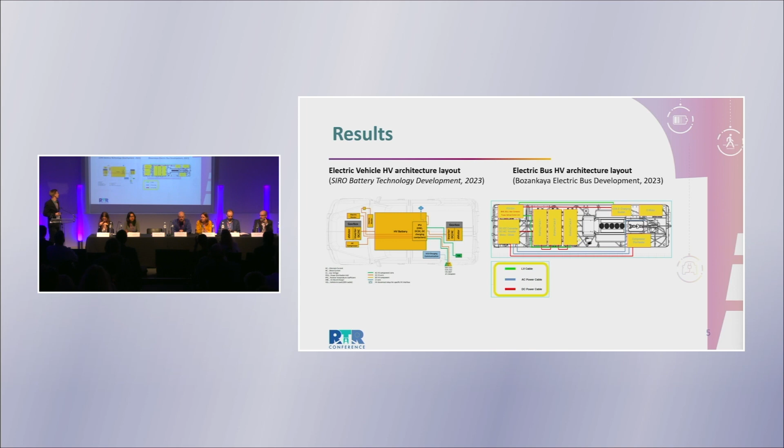I wanted to make it easy since we only have a short time, so I will give you an overview of the results. What we first do, of course, when we want to construct our modules for the different use cases, is define a baseline and general requirements. So we looked at different use cases, for example electric vehicles, electric buses. Then we also have to look at the internal components - for example, you can see here for the BMS the different parts we need, and for the battery thermal management system.

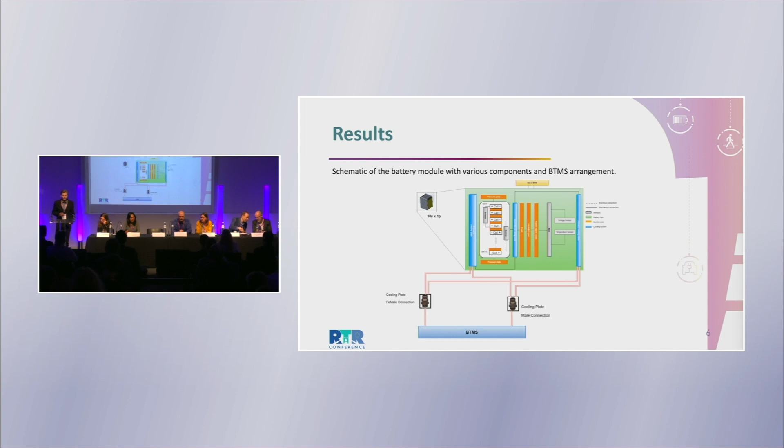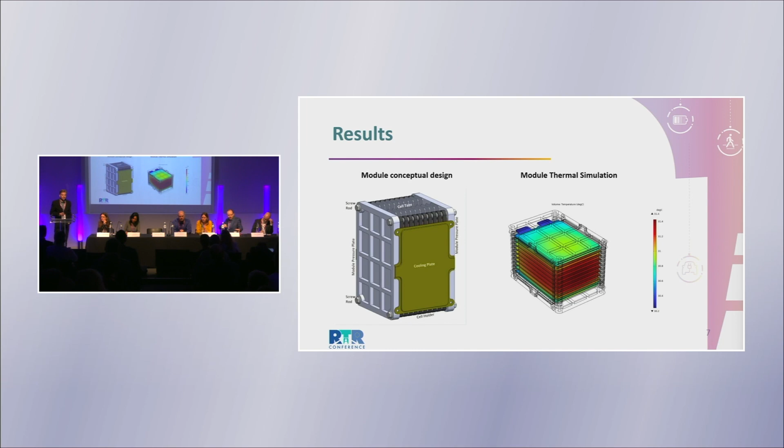At the start of our project, we designed a first conceptual design of the module, which you can see here on the left. We will use this to characterize it with different thermal and electrical simulations.

I just want to give you some aspects of the different work packages. It's not only about building these modules, but also about achieving our KPIs. We looked at different solutions.

One is the electrical solution, which includes wireless communication. In our different use cases, we will actually use 3 different solutions for electrical monitoring of the cells: one includes wireless communication, another also includes printed sensors, and one differs in the amount of sensors, also including thermal temperature sensors.

Other work packages include the electrical characterization of the cell, but also electrical and thermal modeling. In this case, we really use the data we get from the characterization of the cell and use it for our modeling system.

Because one of our KPIs is also thermal propagation, we constructed a reduced scale module testing. We don't want to run all the tests on our 3 full modules and burn them down, so we built this reduced scale module to learn about thermal propagation of the cell inside a module. In this reduced scale module, we also use advanced materials, special heat spreaders, and heat shields.

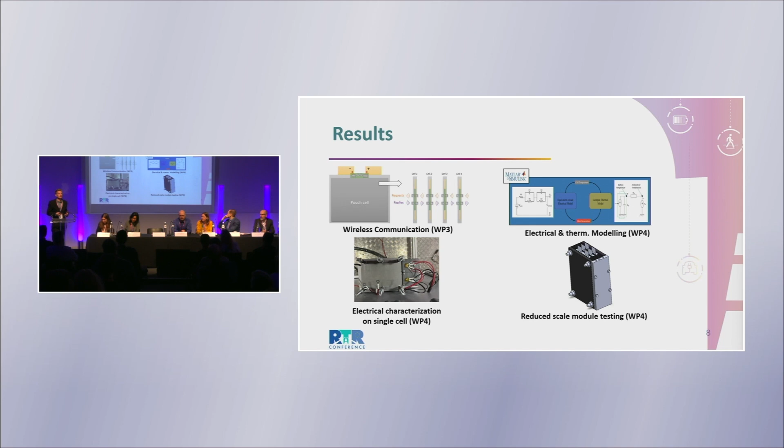Here you can see other aspects of our work packages. In the last months we made progress, updating our design to use more cells. We will use this module design to define certain virtual use cases.

As I mentioned earlier, we have 3 use cases for the modules, connected to energy storage, EV, and buses. We discuss this through virtual use cases.

We also performed abuse tests on the cell, which we will use for our modeling. Another work package is the identification of key exploitable results.

As mentioned today, in the innovation chain we have 3 pillars. We use a technology from pillar 1, which is semi-solid state batteries, and we go into pillar 2. We also want to know what is needed to bring the TRL level at the end of the project to higher TRL levels. That's why we identified key exploitable results which are important in our project, which we will discuss in detail.

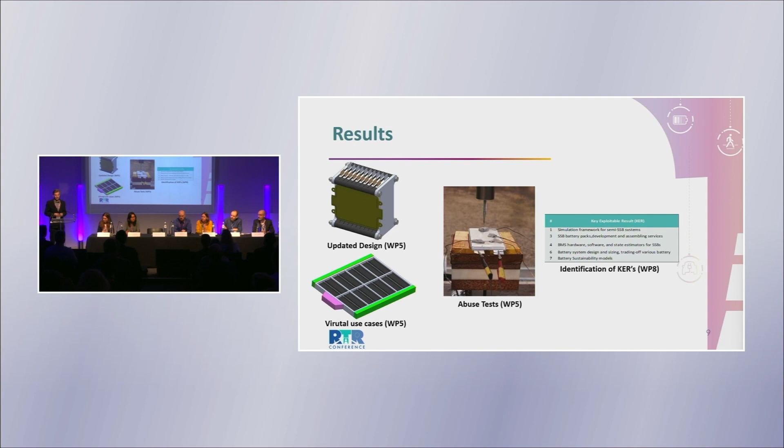Another work package, as I mentioned at the beginning, is that we don't only want to build the modules and estimate the parameters of the use cases, but also want to know about manufacturing cost and recycling. That's why the LDf-X methodology was developed, which is in fact a life cycle assessment study in which we will bring information from our project.

This will also be compared to literature values, but we will also bring use cases from our industrial partners. From BMZ, we will give an e-bus use case, which we will compare here to show that this approach with our modules has high recyclability and good dismantling properties.

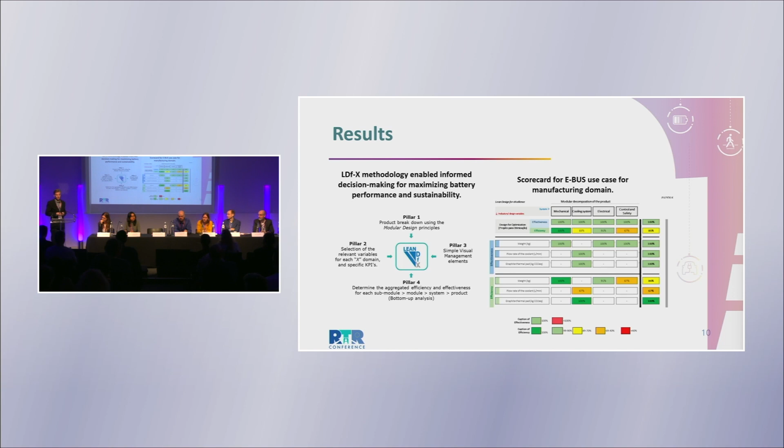Okay, then I already come to the mid and long-term expected impacts of the project. So what is yet to come? Our goal is to build the 3 demonstrators for the 3 different use cases.

We will use different materials which are suitable for the different use cases. We will apply different workloads connected to the different use cases, and then we can test our modules.

Another goal of ours is to have 3 workshops, which are all planned for this year, and yeah, this is yet to come.

And the last aspect is what is important here: for the EU, how to disrupt.

We want to further optimize the semi-solid state battery system, but also the solid state battery which we had at the beginning. I think, as I see the project, it's also an important task to show the benefits and drawbacks of solid state battery technology and compare this to lithium-ion, but also semi-solid battery systems for the different applications. We want to evaluate how we can scale up the capacity of manufacturing.

And this will be one of the big challenges. Of course, we can also do this only virtually, through this life cycle assessment. And then we want to develop sustainable recycling and second life solutions for semi-solid state batteries.

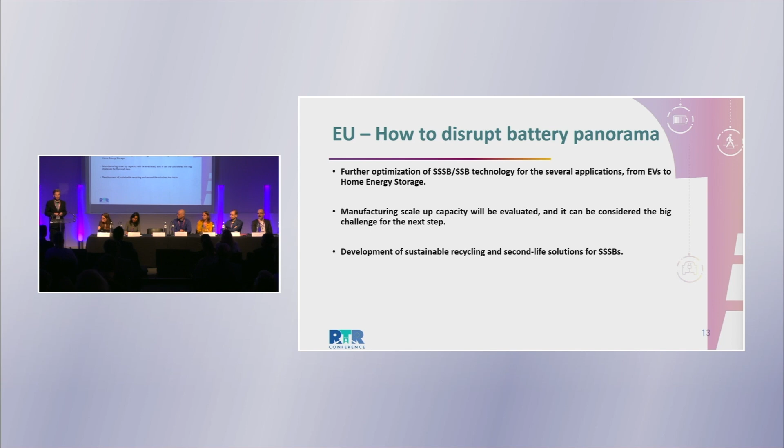Yeah, and as I promised, I made it short. Thank you for your attention.

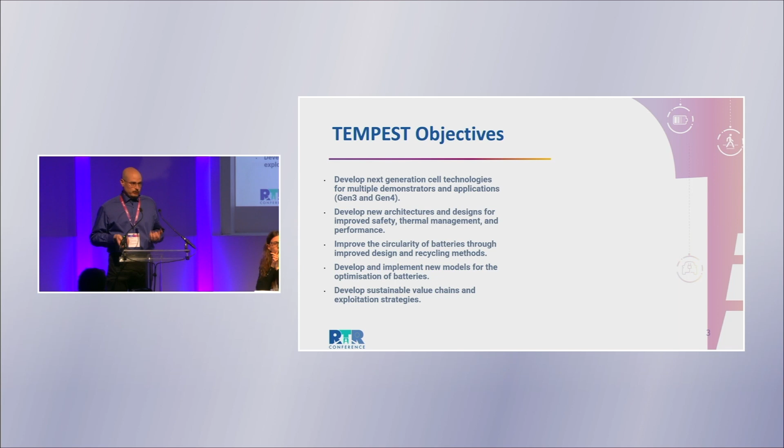We want new architectures so we can optimize space and weight, but also improve circularity through better methods for assembling and disassembling at end of life, recycling materials, recovering metals, recovering graphite and reusing it, and using new models to optimize performance and mechanical behavior of the batteries, and finally to develop sustainable value chains. One thing I want to point out is that we are unique amongst the projects presented today in that we use composite housings. This has been one of the challenges, but also one of the technological opportunities here.

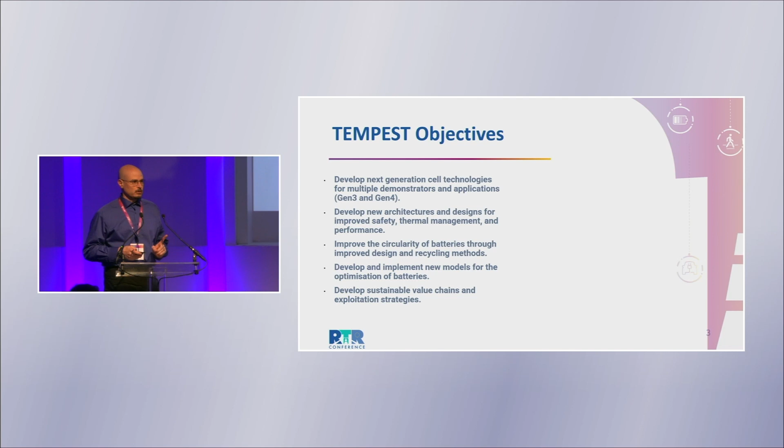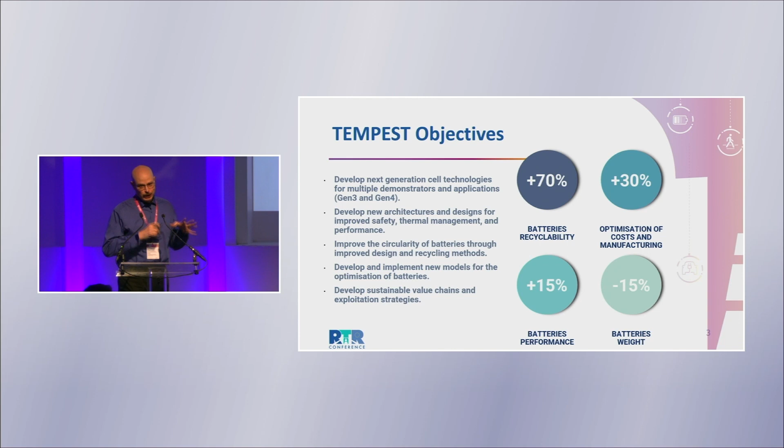Our overall goal is to achieve at least 70% recyclability in the batteries, reduce manufacturing cost by about 30%, increase performance by about 15%, and reduce the weight of the overall pack by about 15%. This latter point, we've already been able to demonstrate, at least in the gravimetric cell-to-pack ratio - we've completely exceeded that. We're at around 80% now, simply by shifting from aluminum or steel housings to composites. We've been able to dramatically reduce the weight.

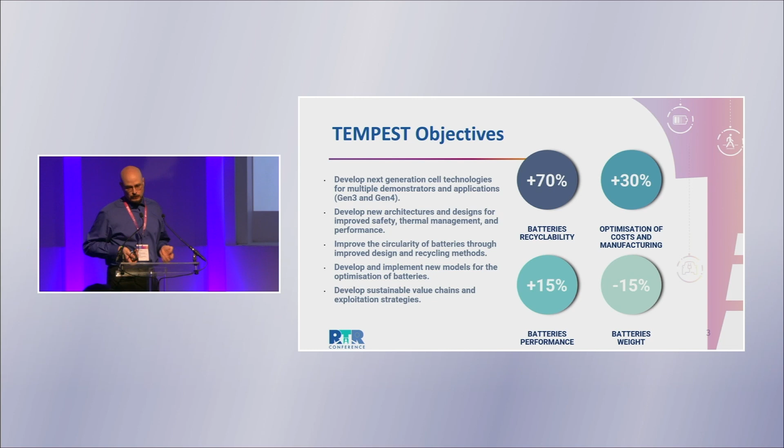In the results, I'll briefly introduce the different types of packs or cells we're using. You can see we have Gen 3 and Gen 4 here, and we've already started testing and evaluating the cells to establish the data baseline for everything else that will be done. One of the important things, as I pointed out, is we have composite systems. These composite systems have different behaviors in terms of what everybody accepts for how a housing behaves if it's metal - crash resistance, corrosion resistance.

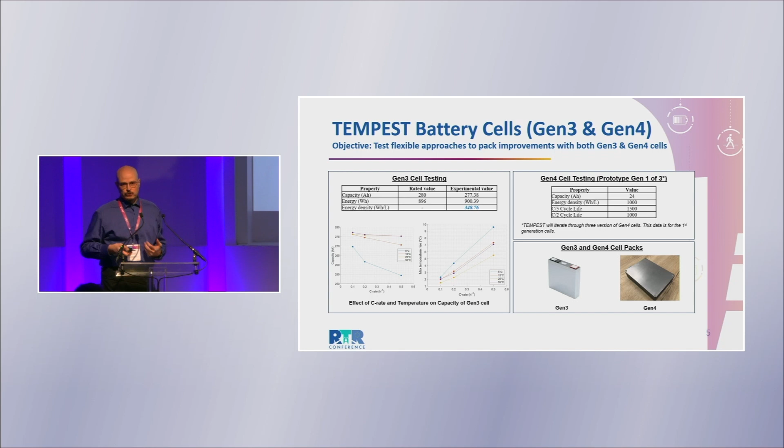One of the things we're implementing is a structural health monitoring system. It will continuously monitor the composite system, detect if there's a fissure, and communicate back to the battery management system to tell, for example, the driver of a car that there's a problem and it needs to go to the service station as soon as possible.

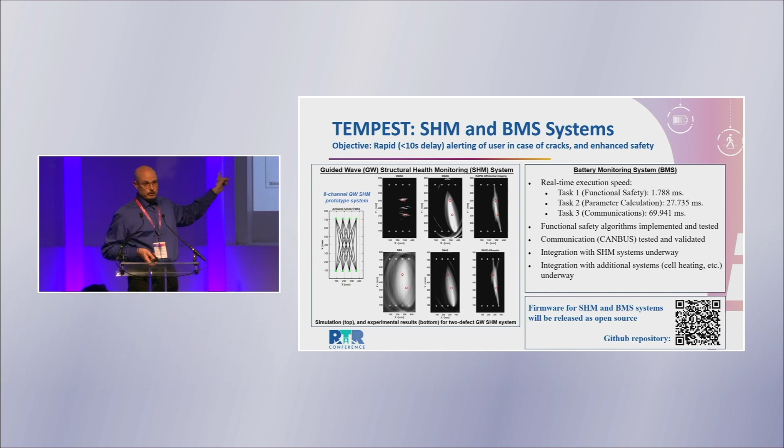The other thing I want to point out is that one of the goals is to be as open as possible. So the firmware for this SHM system, as well as the BMS, will be open sourced and available soon.

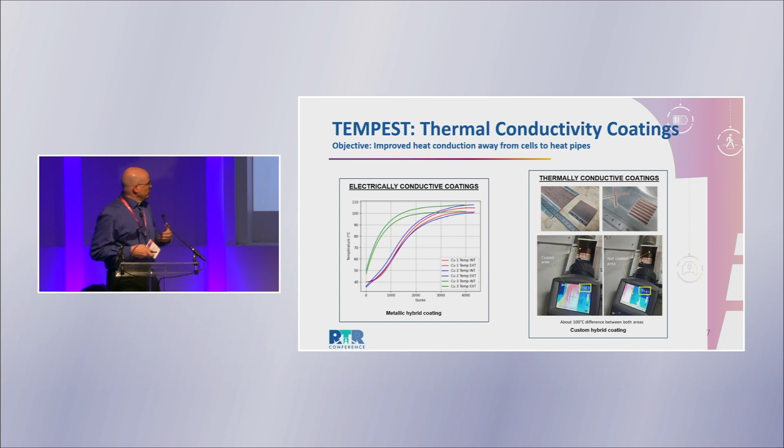One of the other things we want to address is improving thermal management. We're developing thermally conductive coatings for assisting in transferring heat from the cells to the cooling system. These are deposited by cold spray, and these are the prototypes we have right now.

In addition, we're looking at physical and thermal protection. First, we've done modeling to evaluate impact resistance of the housing to impacts such as rocks from the bottom. We've also done modeling to set the computational baseline for when you have the impact of a pole or some other large object against the housing.

To complement this, we are working on impact and abrasion-resistant coatings to go onto the packs.

In addition, fire is always a significant issue. To help address this, we are developing two different types of coatings in the project. The first is a fireproofing coating for the inside, to essentially auto-extinguish any cell fires as they occur. It's a one-time use coating, but it's something we're currently developing. The second is a flame-resistant coating designed to protect the outside.

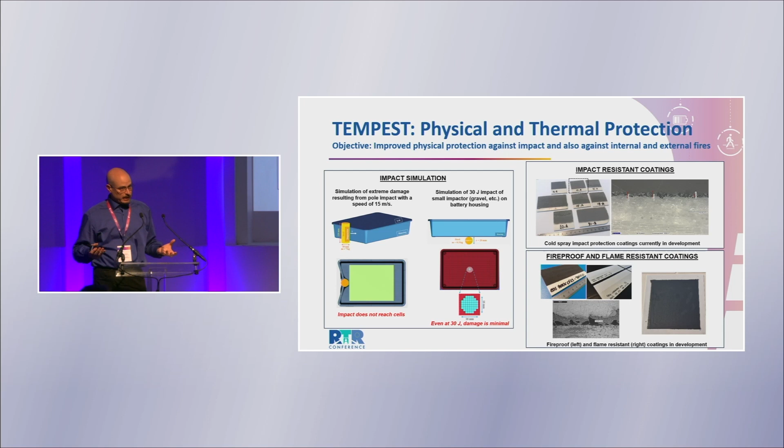Say, for example, there's a fuel leak in a crash and there's a fire. What it will do is swell up and protect the housing, giving it that much more time to resist the heat.

We are also looking at circularity. One of the things that's important is at end of life, how do you address this? First, through using LDM composites, we're going towards a composite formulation that is, by design, more recyclable.

Second, we're using debonding-on-command adhesives, which by themselves, once deposited, have very strong strength. But at end of life, simply through the application of heat, they become very easy to debond—you can basically just pull them apart.

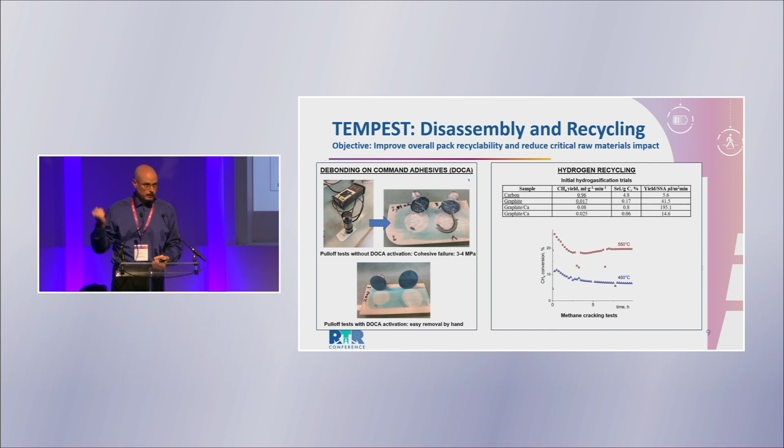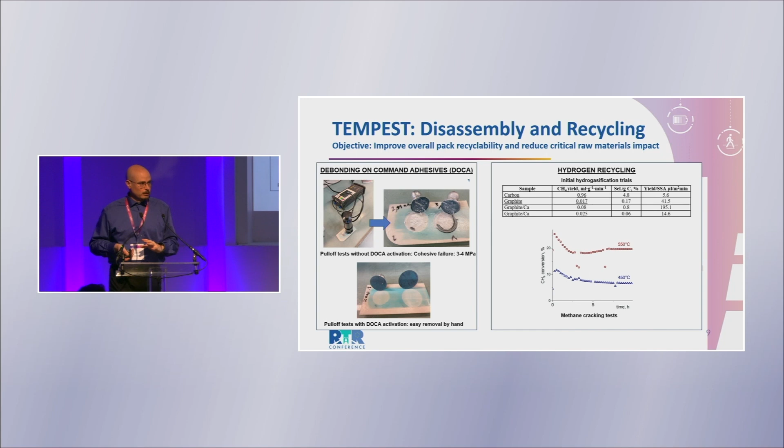The other aspect is that once you've got these apart, the most important thing, the critical raw materials aspect, is something that needs to be addressed. That's the next thing we're addressing, through methods developed by the National Institutes of Chemistry. We're looking at methods using hydrogen routes to both recover and transform the graphite, as well as recover the metals. So the idea is to have a circular pipeline for recovering the materials at end of life.

So what are the mid to long-term expected impacts? There's a lot to go through and unpack. The most important thing is that we want to address the volumetric cell-to-pack ratio and the gravimetric cell-to-pack ratio.

Now, the volumetric cell-to-pack ratio you can improve simply by getting rid of modules—that's one of the easiest approaches. So we're using a cell-to-pack ratio to address that.

Second, the gravimetric cell-to-pack ratio, which is commonly one of the more difficult areas to address. In this project, we've addressed it in large part through moving towards composites, which has given us a huge boost in weight savings.

One thing I haven't talked about here, because we haven't gotten to it yet in the project, is that we're going to develop a system called energy storage as a service. I won't go over it in detail here because it would take a while to explain, but the basic concept is to introduce new economic models for the supply, use, and recovery, essentially developing a circular economic model to encourage both manufacturers and users to participate.

We are also going to engage further with the JRC to help work on developing new standards and new policy. And we are also in the process of developing training programs for upskilling. As mentioned before, I'm the chair of the EU Ingenious Cluster, so I will be happy to address any questions for that.

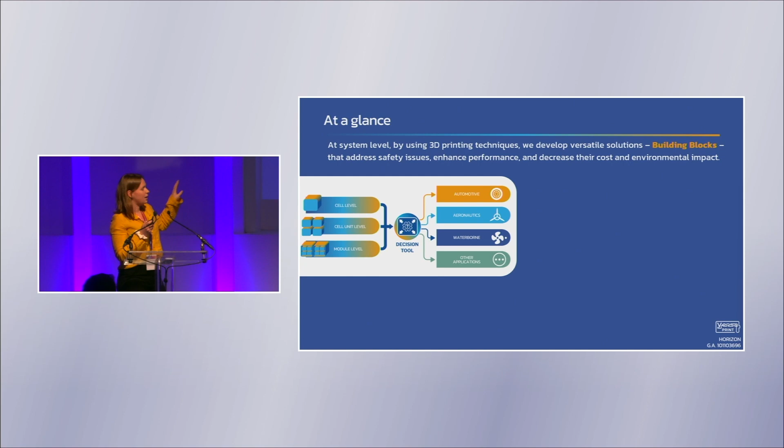At the center of the project, we are developing a decision tool to help combine these new technologies that we call building blocks. We develop different building blocks, and this decision tool will help us combine them for a specific application. We also have a wide range of applications here: automotive, aeronautics, waterborne, and others. The goal is to see and optimize the new technologies for a specific application.

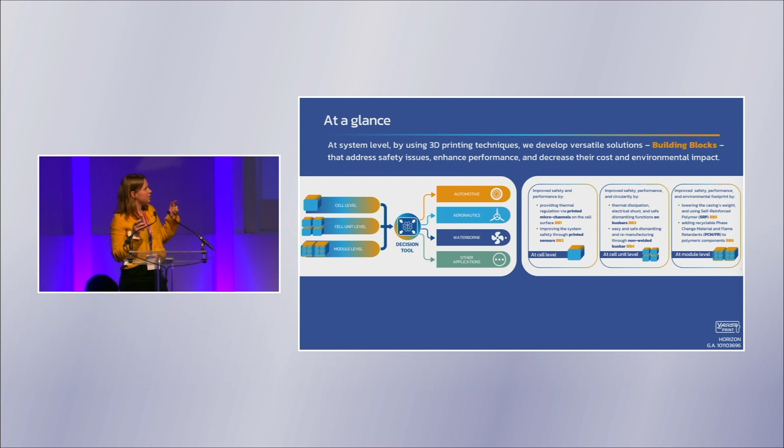A bit more in detail, today I will not present all of the building blocks, just some of them where we have interesting results. When it's called BB, it's building block. So at cell level, just around the cell, we developed building block 1, which is microchannels for efficient thermal management, to cool down the cell efficiently.

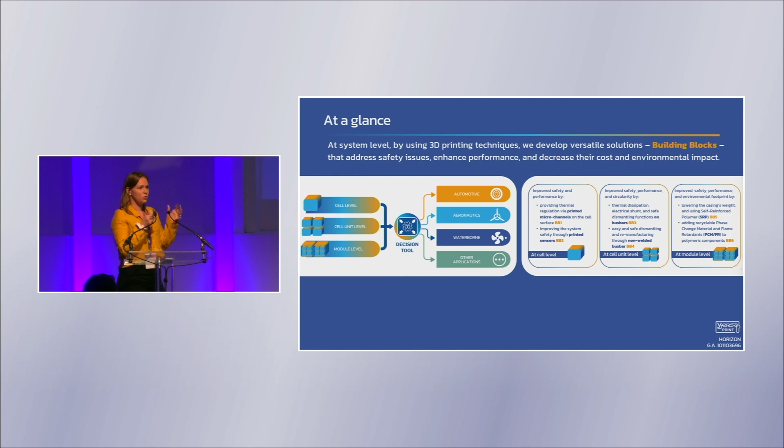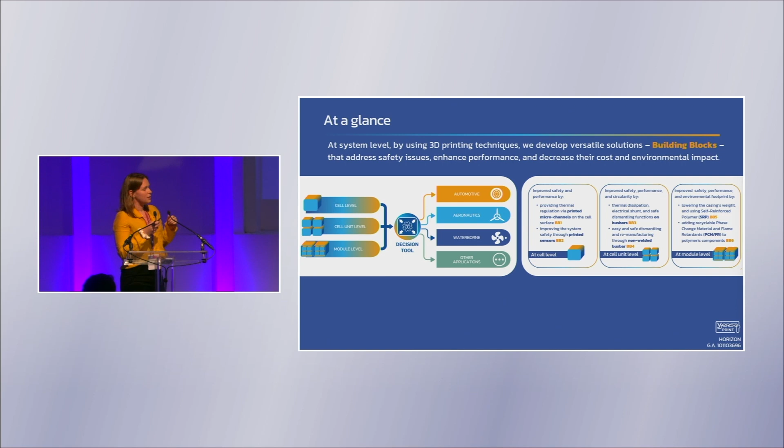And we 3D print this cold plate in silicone directly at the surface of the cell. I will also present you building block 2, sensors that we would like to print directly at the surface of the cell to sense temperature and detect hydrogen.

At cell unit level, it means connecting different cells together. We mainly worked on bus bars, and I will present you some interesting bus bars we developed that are non-welded and easy to assemble and disassemble. At module level, we worked on lightweight material for the casing and also an exhaust gas management system to drive particles and gas out during a thermal runaway event.

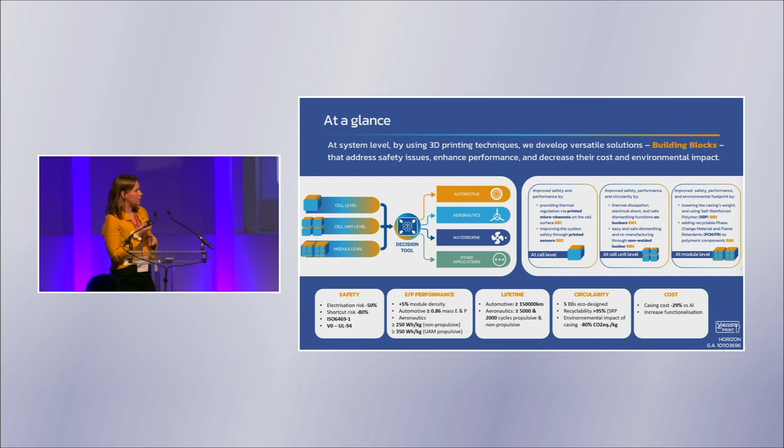Here you can see the KPIs, the objectives we have in our project, and you can see that they all target and try to answer the challenges batteries are facing today. They aim at increasing safety - we've talked before about problems with thermal runaways, for example. So we do have technologies that try to increase safety, increase performance, increase lifetime and circularity, working on sustainability of the technologies we develop, while trying as much as possible to reduce cost.

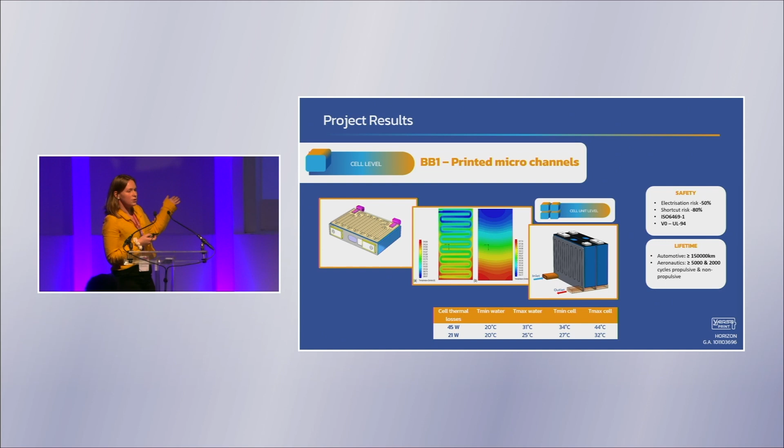Now, going into the details and results we can present after 18 months: we developed building block 1, microchannels you can see here on the left. It's a silicone plate that we 3D print directly at the surface of the cell, which cools it down very efficiently. Here you can see the thermal losses at 1C and 3C, the heat generated, and we can see we are keeping the cell at a very nice low temperature.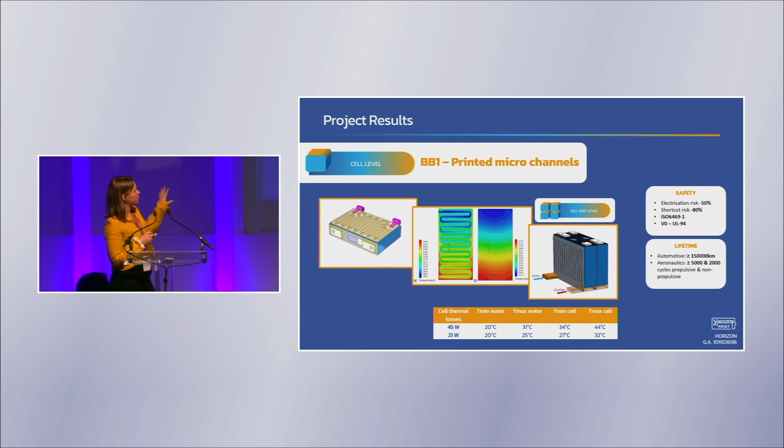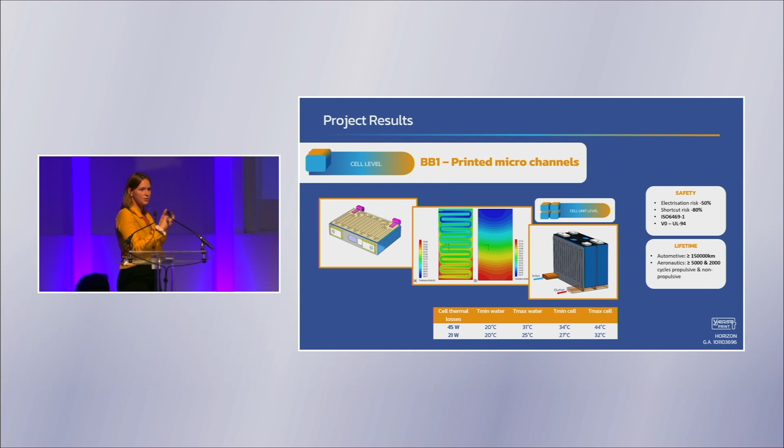This building block will have an impact, increasing safety because it will delay the thermal runaway event by cooling down the cell efficiently. It will also impact lifetime, because the conditions around the cell - temperature, pressure, and others - affect battery lifetime. So it increases performance and circularity.

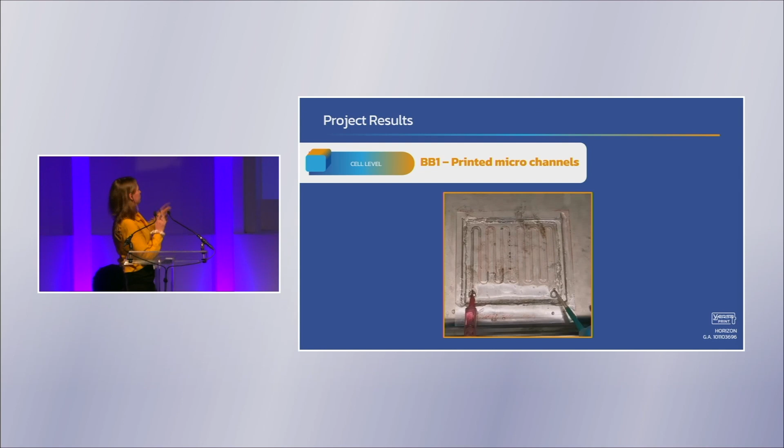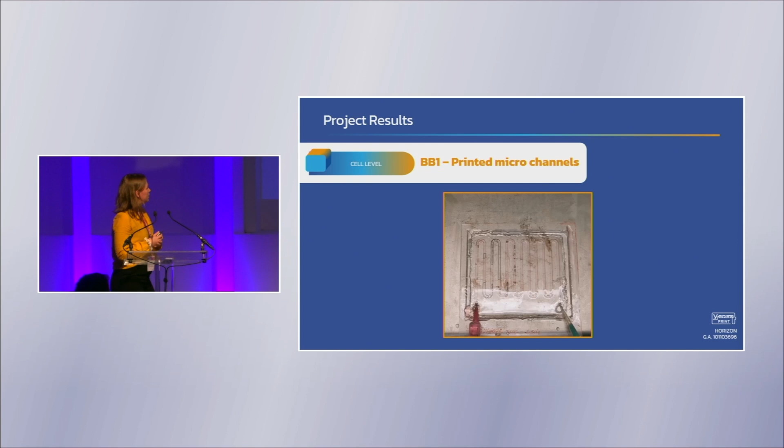Here it's actually a small video - I don't know how it works to click. Okay, it's starting already. This was actually from a few months ago, so now it's much more optimized than this, but it shows quickly the fluid circulating very nicely with no losses, no mechanical losses during the flowing of the fluid.

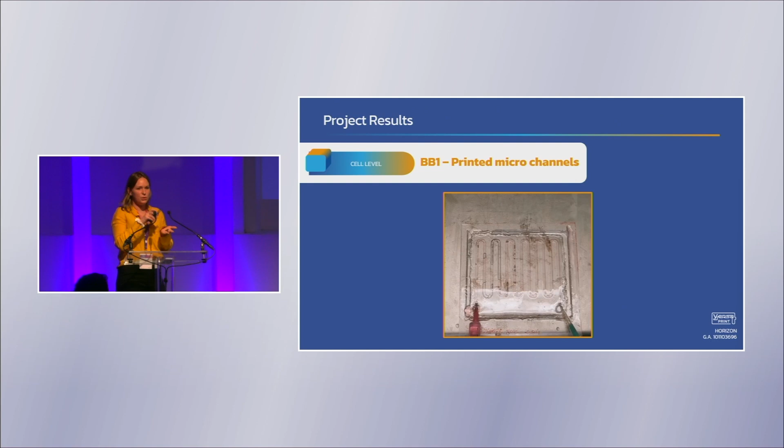And this we will print - we are printing it actually right now directly at the surface of the cell.

The second building block I am sharing with you is the sensors. These two sensors have been developed, and are still being developed, in the project. They have an impact on safety because we want to prevent thermal runaway or detect it. The first one detects temperature directly on the cell, and the second detects hydrogen, a gas produced when there is a thermal runaway event. Both sensors have been developed with water-based inks, making them more sustainable than commercial sensors.

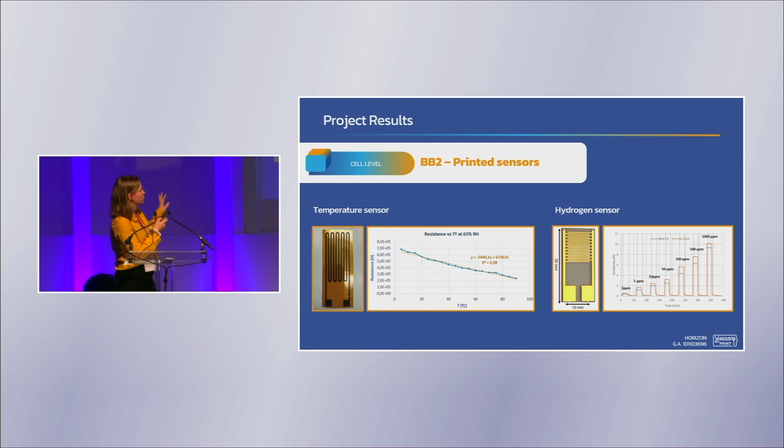We can see a nice linear answer for both of them. For temperature, we can see a linear decrease with a nice slope that makes the sensor sensitive, in a range of 0 to 100 degrees. But we do face challenges - we are still working on it - particularly in negative temperatures.

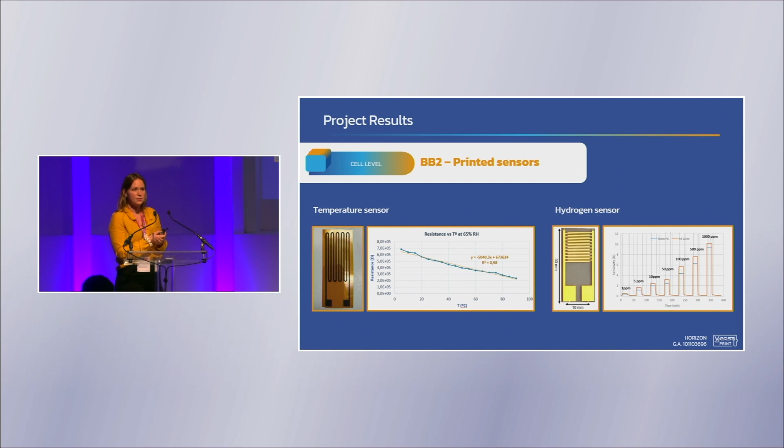For the hydrogen sensors, we can detect very low amounts of hydrogen, so it's very precise. We are still working on it because we face challenges here in the response time.

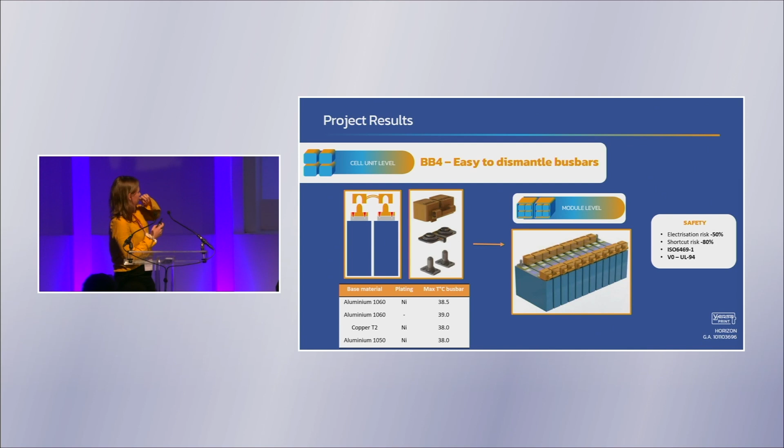Another building block, at cell unit level - when we connect cells together - is building block 4: an easy to dismantle bus bar that is non-welded. You can see the principle of this bus bar on the left here. We have this lower part that we weld directly on the cell, and then we only have to connect and clip the two higher parts on top of this welded part to connect the cells together.

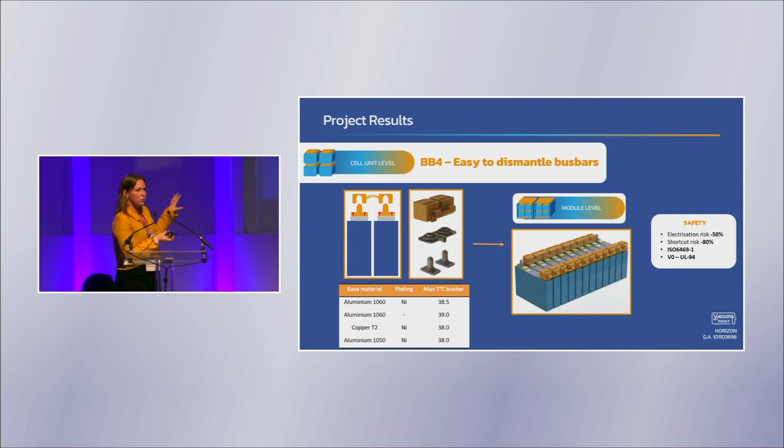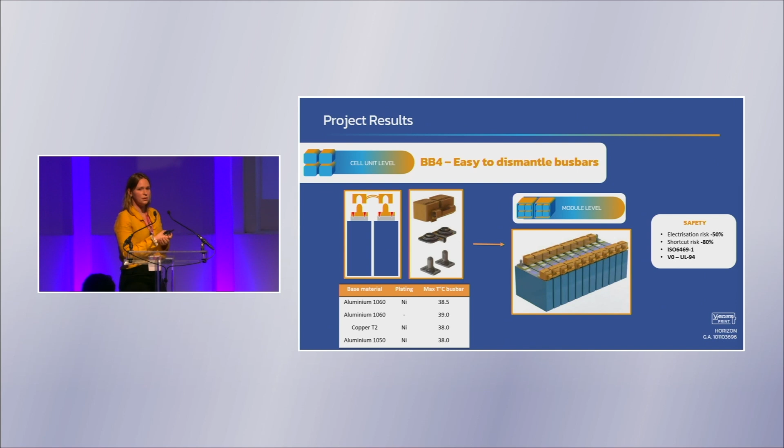It's a system that connects all the exits of the cells so that when there is a thermal runaway event, it collects the particles and gas that come from the thermal runaway and drives this out of the system in a precise location, also reducing the temperature of the exhausted gas and filtering the particles. This can prevent the gas and mix that comes out from catching fire.

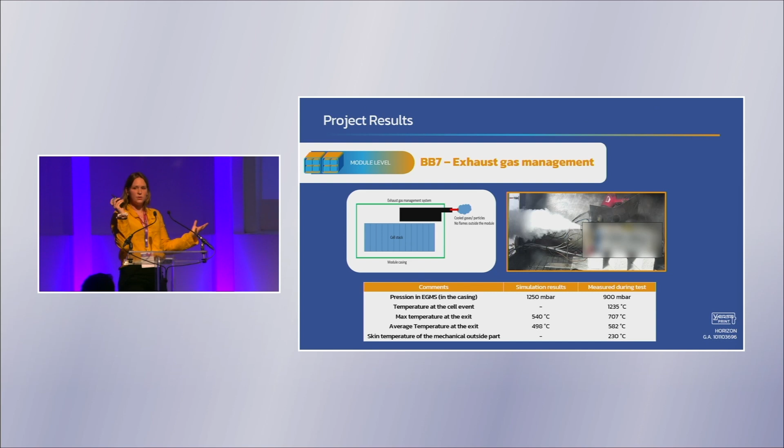You can see on the right the test we performed by overheating a cell. You can see the heat gun, and you can see the gas coming out in a precise location. So the gas didn't come out at some random point in the casing, but was driven to a precise location outside safely. You can also see it doesn't catch fire, thanks to the filtration, the pre-filtration inside the system of the particles.

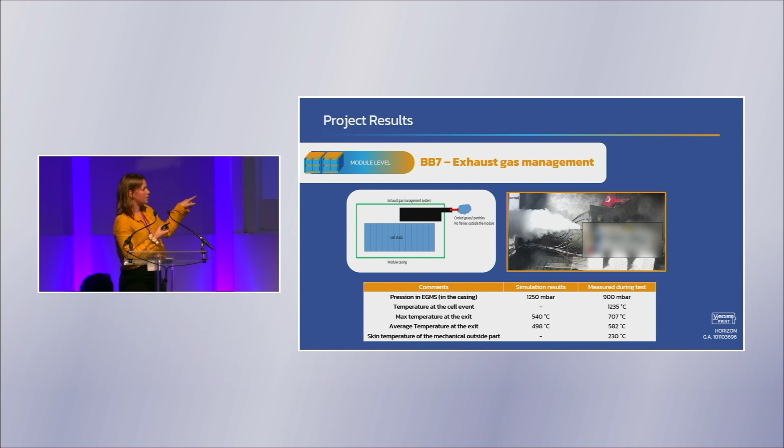What is interesting in the results is that the measured temperature at the cell where the thermal runaway happened was 1,200 degrees, and the temperature of the gas that came out was divided by 2, so 600 degrees. We actually have even better results right now, but it's already a very promising result.

Now, all these building blocks and technologies we are developing in VERSAPRINT answer the targeted objectives from the European Circular Economy Action Plan of 2020. Mainly, we are trying to increase the lifetime, to reuse, and to make it easy to disassemble and assemble, easing the processes at all phases of the technologies. We are also working on eco-design and lowering the environmental impact of our technologies. I will show you a bit more about this in a second.

VERSAPRINT also contributes to implementing the conclusions of the European Council, mainly developing versatile solutions, as I said in the beginning, for different transport applications. So we will be able to use different technologies for different applications, decrease fossil dependency, improve health conditions, and increase performance and safety while reducing costs.

Now, talking about sustainability, I take this opportunity to show you some results and concrete methods we used in VERSAPRINT to tackle sustainability and improve the sustainability of our technologies and batteries in general. We used two approaches: eco-design guidelines given at each point of the life cycle of the technologies, and on the other side an LCA tool to assess the environmental impact of our technologies.

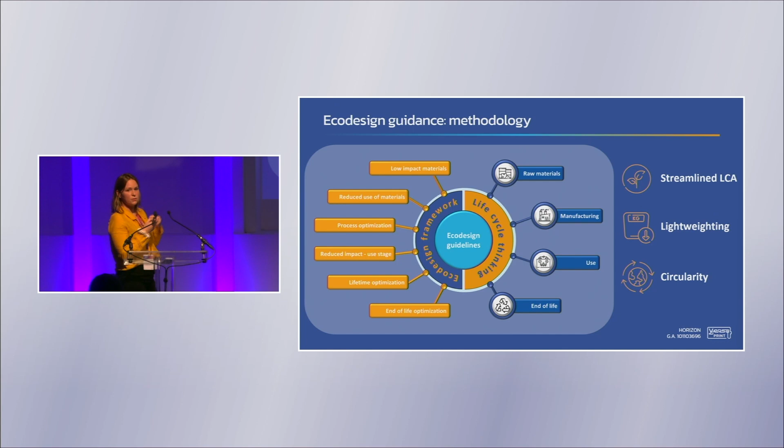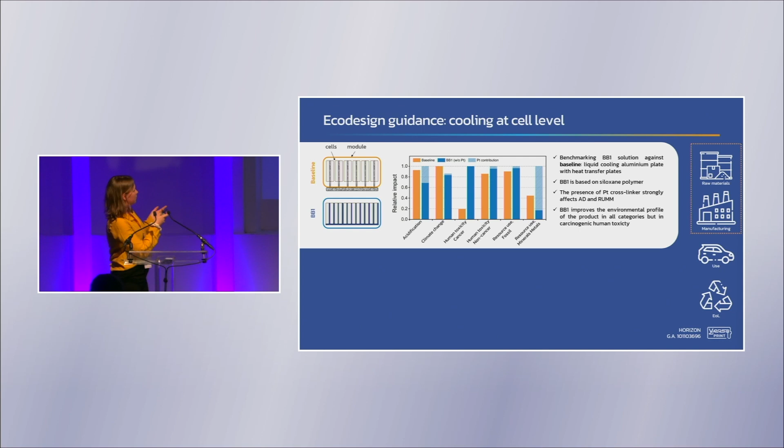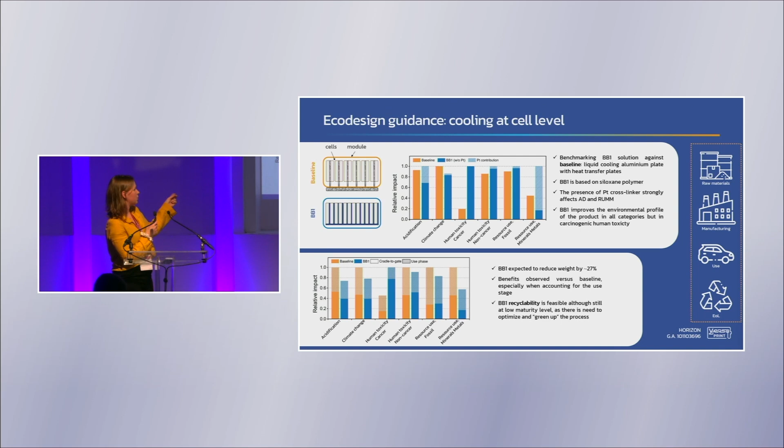But when we take the use phase and end of life phases into consideration, not only production, we account for the reduction in weight compared to the classic solution. We have a lightweight material, so less consumption and less environmental impact. This is what we see in the results: for not all, but some of the impact categories, we see lower environmental impact for our technology.

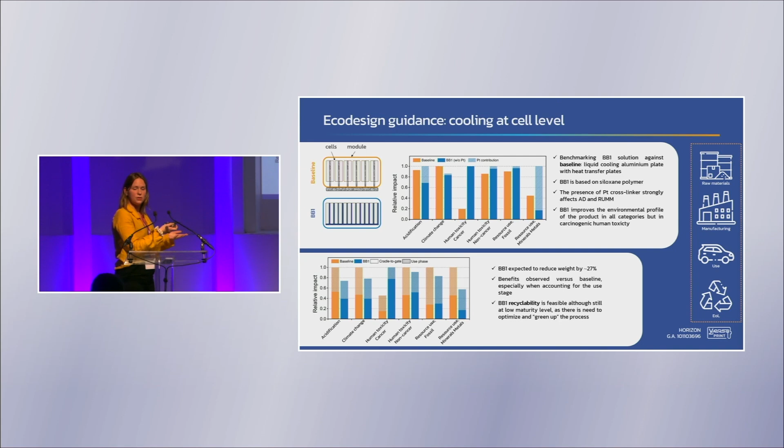This is what we have done for all the technologies we developed, to make sure we assess them and try to make them better than other commercial classic solutions. I have other results; if you want to talk about it, don't hesitate to come to me, and now I'll jump to the conclusion.

You have here our social media, and we also have deliverables that are public, so you can check our results, and you can always contact us for more information. I will be happy to answer and to contact you about this. And thank you for your attention.

Thank you very much, Lisa Lou, and thanks all the speakers for keeping the time. It's very important. We are already at 5:14. So one more thing I would like to say is that all our projects are aiming to achieve TRL 5 by the end of the project, meaning their demonstrators and technologies will reach TRL 5, validated in a relevant environment, and not going above. So it's good to remember this for the questions and answer session.

The next project is NEXTBAT, presented by Mikko Pihlatie, research professor on electrification of transport at VTT. The project aims to establish reliable and innovative battery systems, as well as to enhance recyclability and interoperability. It will incorporate battery management systems at the cell and system level and integrate innovative electronic sensing and actuating systems to enhance battery life. Finally, the project will contribute to decreasing the carbon footprint of the battery system by lowering production costs, with high recyclability capacity of both hardware and cell components introduced along the production chain. So, Mikko, the floor is yours.

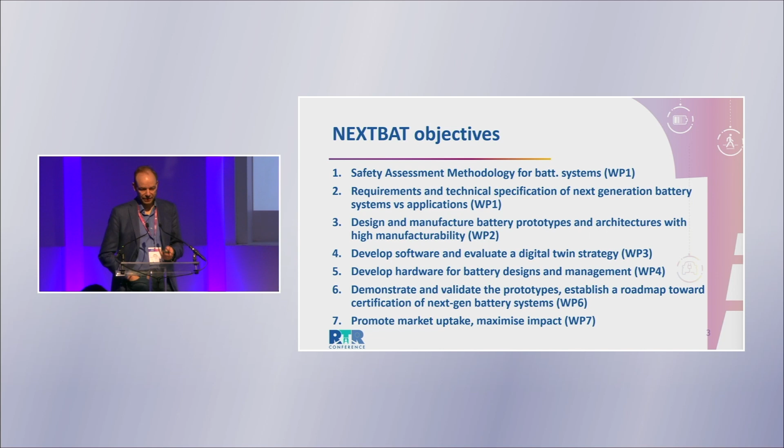So that's the setting. And now let's just delve into some of the highlights or the chosen results where we stand at the moment.

We set out to look into technology from battery cell being, of course, a key component of any battery system. So we need to understand sourcing cells, analyzing cells from the market - we were aiming at solid state battery packs or modules, struggled a bit to find solid state batteries from the market, and I think this has become quite clear for many actors here. So we made a compromise, as we heard also extended, using semi-solid state cells, and this is kind of in between.

We are wanting to push the specific energy towards 300 watt-hours per kg at system level later on. We will not reach that in NEXTBAT here, but we still want to analyze what that kind of technology will mean from the battery system level side. So there were generation 3B, more or less in the domain where the technology is at the moment, and 350 watt-hour per kg is the semi-solid cell track for the prototypes aiming at higher energy density.

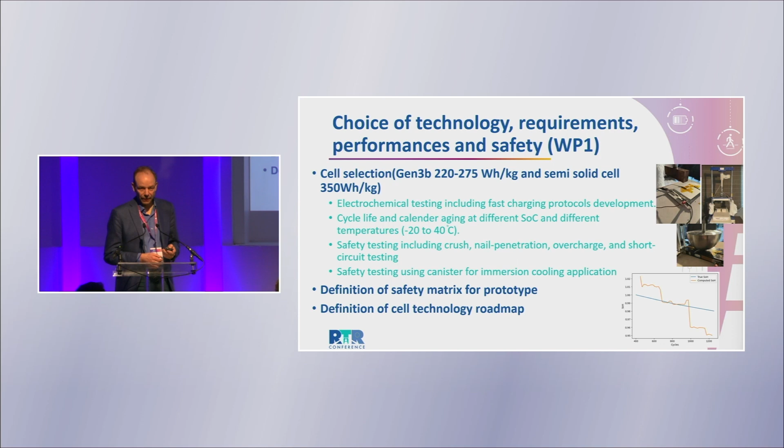So we've done various electrochemical testing, fast charging, cycle life, calendar life, aging - various types of quite standard testing. Safety testing at cell level, I'll get back to that a bit later - it ended up a bit later in the slide deck. Safety testing with a canister. We're working on immersion cooling at the second prototyping track, a bit more on that shortly. Safety matrix for testing - now we work at the cell level, but later on the safety validation and testing will be pushed up to module level. And then the cell technology roadmap, as we know there will be a lot of developments coming up.

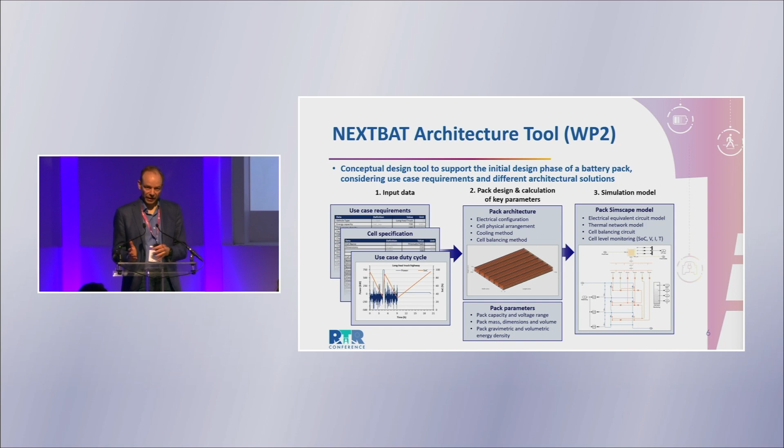Another big piece from another work package here, starting top down on design tools, how to approach the system architecture, system layouts, and there will be various combinations of these. So we have put up a library of duty cycles from the different types of road vehicles and others, conceptual design tools to take into account thermal design aspects, electrical architecture aspects, cell performance, duty cycles, and various configurations - excluding mechanics, because we are not reaching TRL5 for really mechanical packaging of packs. But this gives us a solid background to really work around the different concepts for technology and systems, and also place the different innovations that we're working with into the analysis framework.

A bit more on the prototypes. As said, 2 prototyping tracks - one aiming at high energy, so using the semi-solid state cells. This is for prototype 1. It's not a design-frozen module yet, so we'll stay at module level: 48 volts, 14 cells in series, 1 in parallel.

Packing of those, liquid cooling, BMS, and then packaging that at the module level.

Whereas prototype 2, we push the power density to a higher level, including two innovations here. One is the immersion cooling system. What's not shown here is that we're also working on the casing because we need a pressurized system, and it's also fiber-reinforced plastics combined with joining with aluminum. The reference would be a steel casing or aluminum casing there, so that's the weight reduction element.

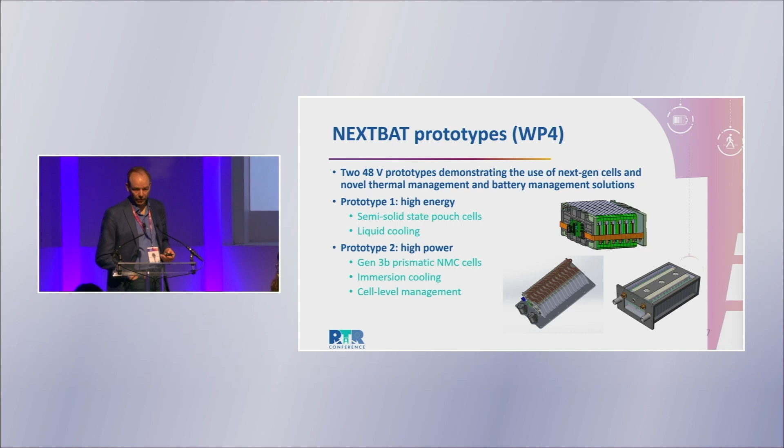A second innovation will be cell level monitoring, EIS, for advanced diagnostics to really work on safety-related states of temperature, for example, and then we have a maximum effective thermal management system to control that and really be safe, not to run over into the thermal runaway side.

Large activity in the high order models, and especially we have Barcelona Supercomputing Center being the main partner there, CFD modeling, and really analyzing the flow geometries and cooling, thermal runaway simulations included, so that's a high fidelity approach.

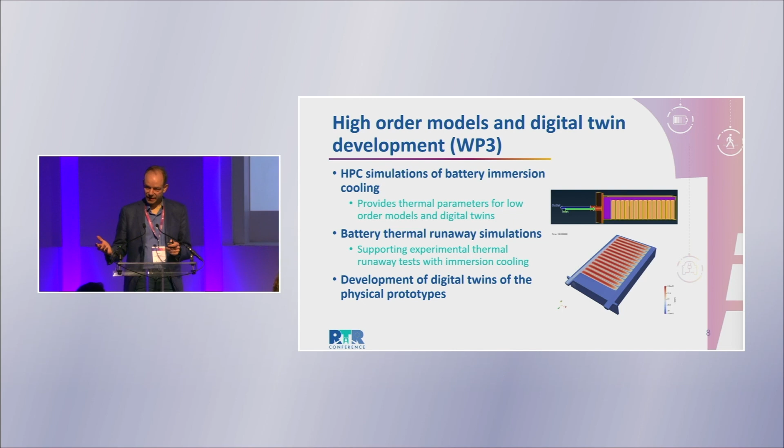We also have a number of physics-based models training AI surrogate models for cells for performance degradation and so on, and that will also lead, once the final design of the prototypes is fixed, to digital twinning of those and matching that with the test sequences, validation sequences, both normal operation and safety.

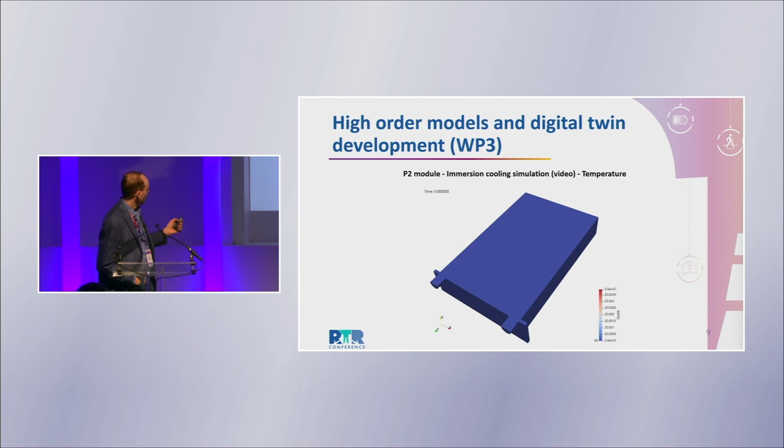And now let's see how the simulation video here works. I'm not completely sure how to start it. Yeah, it does. So just showing this is prototype 2, seeing a sequence of the thermal flow.

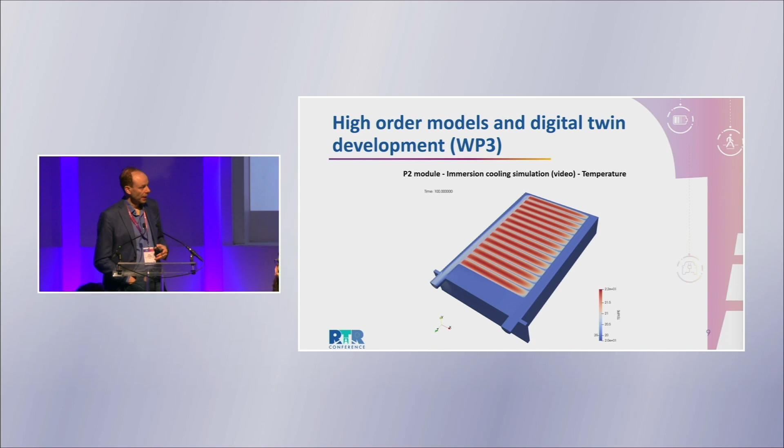And how the temperature gradients develop as part of the design space. We also did a sub-element like cell level simulation, choosing the electrode or the oil and some of the elements there, and I think this is done.

There's another one, fluid velocity, that was the temperature first. So this is also validating at this stage when we're finalizing the designs of both prototypes. This is on P2 on the thermal side.

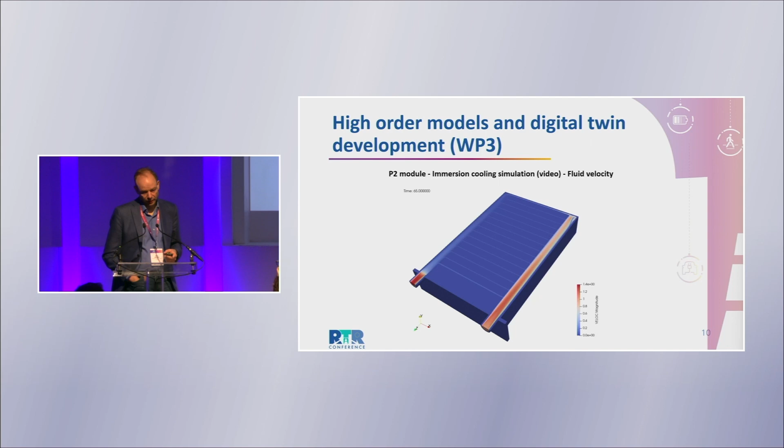I believe it's maybe, yeah.

Just a couple of words on the cell testing. So I started with the cell selection. We've looked into available cells, and we'll be following the roadmap type of approach later on, just to place well, as part of the comprehensive safety approach.

There's an inherent safety of the cells. Then there are intermediate subcomponents like thermal barriers, thermal management, and the management system as a whole, and then the structural elements and so on. So this is part of the inherent part, internal of the cells.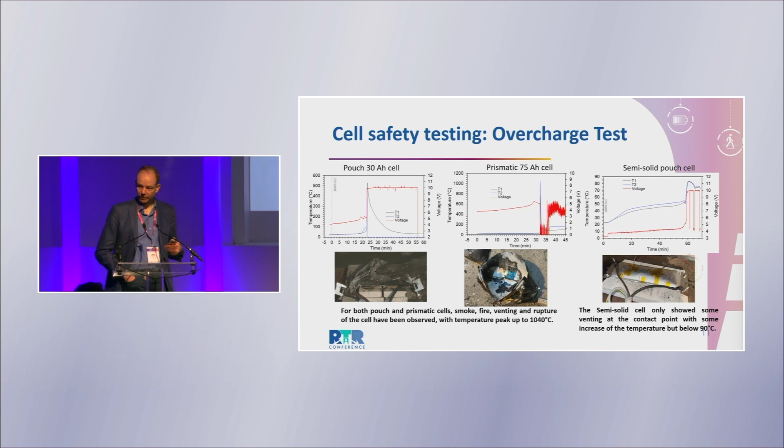So we've done destructive testing on all of the cells that have been in the matrix for screening. And later on, when the prototypes, two of each design, will be manufactured, they will also go to safety validation and testing later on during the second period here.

And then this is the last result I picked up. We're working on the battery passport, like usage analysis, and this is also supporting the LCA life cycle assessment, life cycle cost analysis, using the recently published regulation or standard on the battery passport, and how to utilize the data.

And this is linked into usage profiles. We also expect, with the digital twinning and the laboratory experiments, to really bring specific information and interface this with the BMS, which is of course an integral element of the safety approach as such.

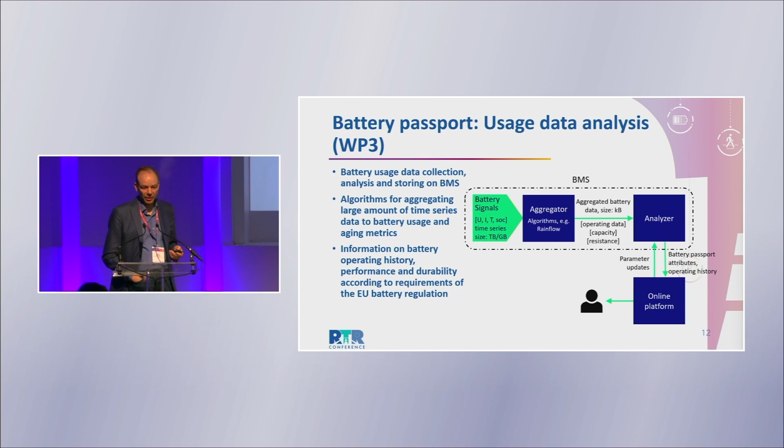Currently, as said, we are more or less, as we delve deeper still into the actual innovations that we work with, charting out the individual tracks.

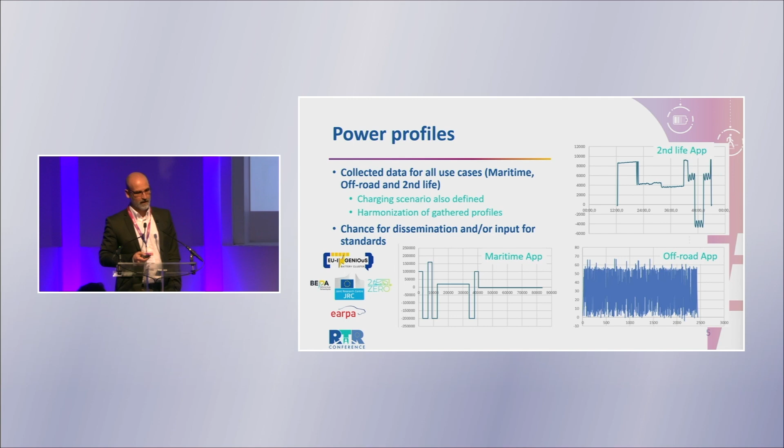Another result is based on impedance spectroscopy, which we are trying to use to assess the quality of the weldings between the bus bars and the cells. You will see afterwards that this project is about cylindrical cells, indeed you can see it because of the format.

21700 was the baseline, defined by MIBA battery system, but this project is about 4695 cells, these thicker ones. And the technology, by the way, is NMC, advanced NMC.

With some samples related to the 21700 thin bars, we were not able to distinguish any difference between a high quality welding and a bad welding. But in December, when we started creating samples of the new bus bars related to the thicker, higher current 4695 cells, we could use it as an element to assess the welding of this bus bar and cell.

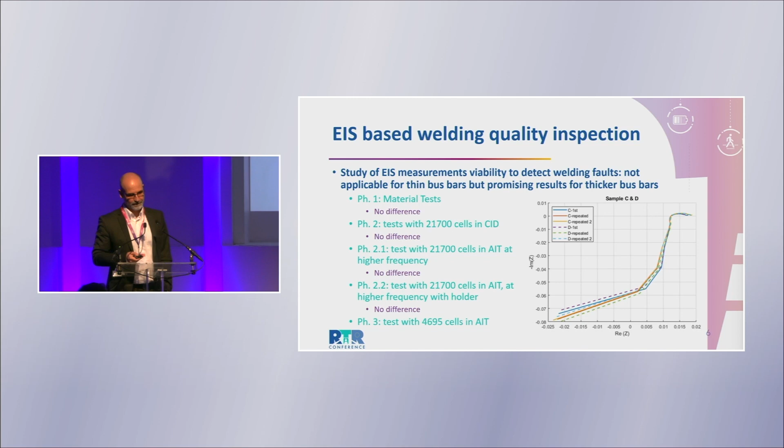The idea is to implement this in the production line, so it can enhance the cost and improve production. This is work in progress, and one of the important milestones that we have.

As mentioned by some of our colleagues, the plan was also to create a downscaled module design, so we can do iterations with respect to the simulation we are already doing. This downscaled module has already been assembled by the colleagues of MIBA, and in March it will be tested at CIDETEC. There will be a deliverable, and this will be a good reference to compare with the simulations we are running, to create iterations.

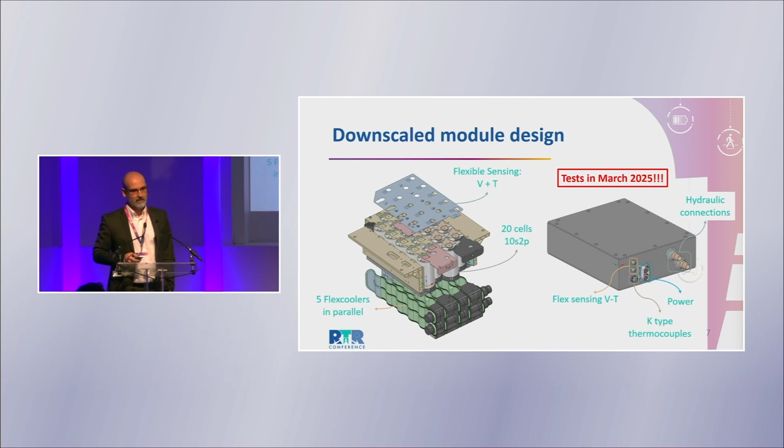It is likely we will produce another one during the year to continue with these iterations. On the electronic architecture side, the goal is to build a wireless BMS. There is already a master-slave structure BMS that has been successfully tested with quite low power consumption.

Regarding cloud communication, we are going to improve an existing interface and select some hardware for this cloud communication. One aspect that will enhance safety is internal short circuit tracking, mainly done by CIDETEC. We already did this analysis fully on pristine cells, and now we are going to do it on aged cells, to detect the internal short circuit before it happens, or very early in the preliminary phase. Another point is to design a power switch based on silicon carbide technology.

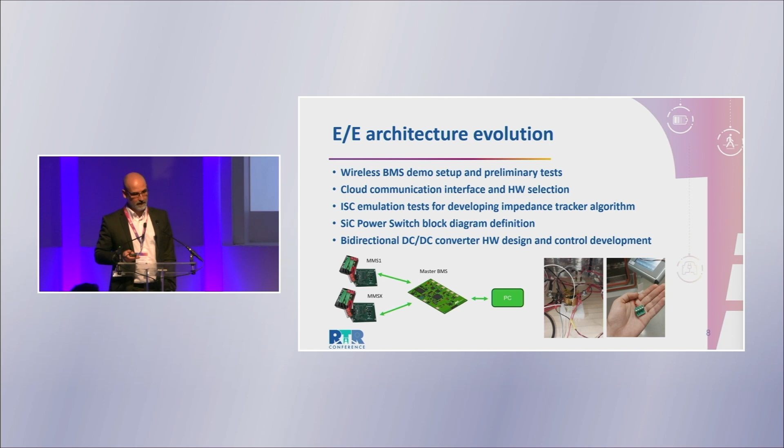On the other hand, VUB is focused on an interleaved bidirectional DC-DC converter, for which they have recently finished a preliminary design.

On the other hand, here you have the CAD file that we have finished, which is quite advanced already, according to the boundary conditions of the use case, especially the marine application. So the idea is that we have a concept starting with the marine application, and the aim is that this is modular and scalable for an off-road application, an excavator.

This cell-to-pack modular concept is mixed this way: on the right you see a cell-to-pack, with several cells in a battery pack; on the left we have a battery system. In this cell-to-pack concept, there are even bricks that could be reused for a stationary application. So we are trying to mix the cell-to-pack concept with the modular concept.

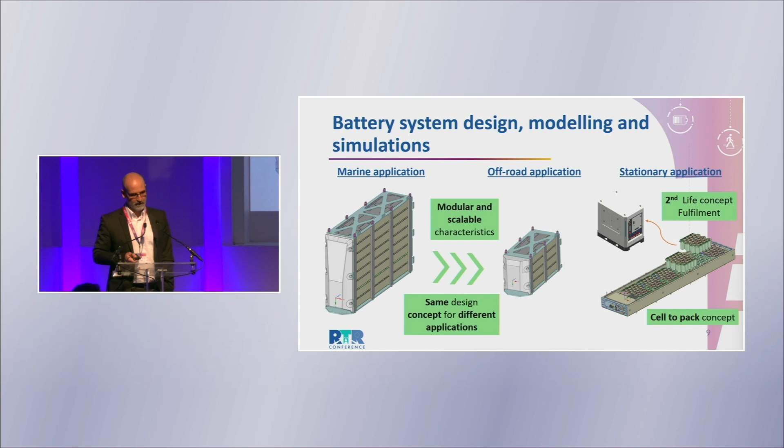So this is about the result. I did not mention that, of course, we did all the cell characterization activities and abusive tests and so on in order to reach 1D models, electrothermal models, that at the moment we are scaling up to 3D electrothermal models that are the ones we are going to compare versus the experimental data we will get from the downscaling module.

Regarding the outcomes, they are quite generic, because this is the first year, so this is what we expect to get. The idea is to reach the next generation battery system with increased performance and safety for transport and mobile applications. This could be divided into transferring this knowledge to different types of vehicles and segments, and implementing the safety-by-design approach into the usual R&D process.

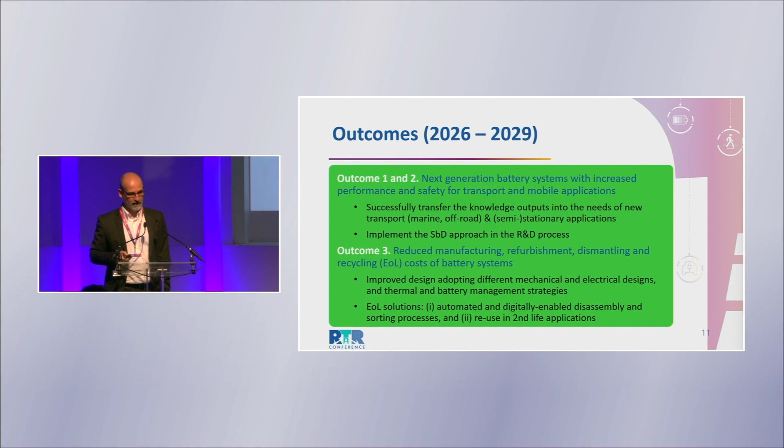The other outcome would be to reduce the manufacturing, refurbishment, dismantling, and recycling cost of the battery system. This would be done by taking these aspects into account from the very beginning of the design, with this modularity concept, and by proposing an automated disassembly system and a tool to assess the reuse and second life of the battery.

Finally, in the longer term, the idea is to increase the competitiveness of the European battery ecosystem. As I said, the cells are European, and the idea of the pack also comes from one of the European partners. So we hope that we can push and extend this concept to the rest of the markets and products.

As I said, the advanced NMC technology we are using links to the second impact: we are promoting European cells, using them, and collaborating with an external manufacturer to include it in our project. The other important impact we hope to reach is to make a product attractive for citizens and for any business, in terms of safety, reliability, and cost, by enhancing the design, energy density, volumetric energy density, and the safety measures mentioned. And that's all.

Thank you very much, Jos, for the presentation. Someone should have scared you, all of you, to respect the time, because we are very ahead of schedule, but this is good.